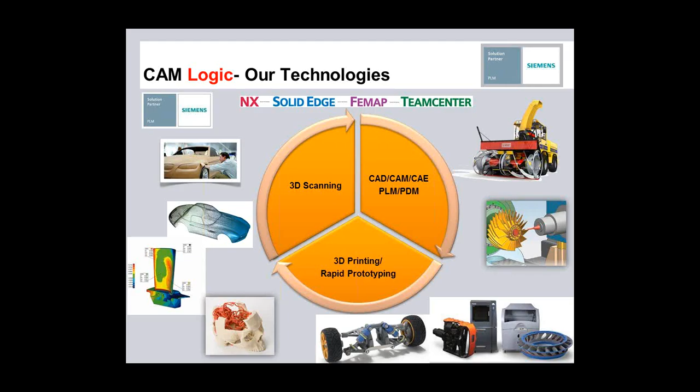If you are looking to learn more about Femap's powerful modeling functionality, this is the webinar for you. Today we'll take a look at some of Femap's powerful modeling functionality and see how it can be used to import a CAD model, fix problematic geometry, and prepare the model for subsequent modeling.

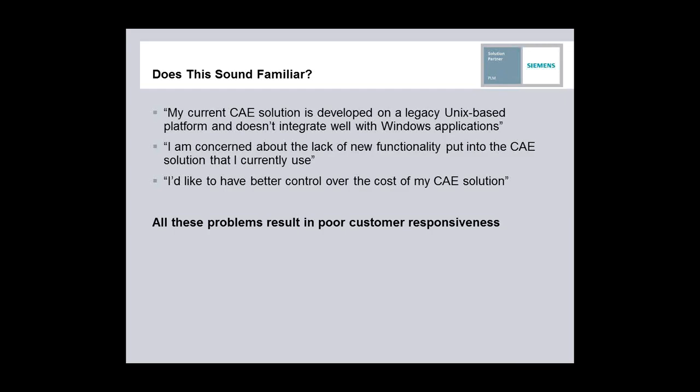Does this sound familiar? The most common problems aired by companies still tied to legacy Unix-based CAE pre- and post-processors sound something like this: there's a lack of Windows integration in both look and feel. These older platforms are aging in appearance and don't work with Windows very well, which in turn affects productivity. In some cases, development of these products has been sidelined by the developing company and is noticeably falling behind through lack of new functionality and working methods. Even though development of these products may have slowed, lack of investment in the product from the developers has not brought any cost reductions to the end users. All of these problems result in poor customer responsiveness.

How can you ensure your CAE solution is keeping up with the latest simulation technology? By introducing a modern simulation solution into the design cycle, you can design to more complex customer requirements through more advanced modeling and analysis functionality. With an up-to-date CAE solution, you can employ the latest simulation technology to more accurately represent not only the design itself, but also the operating environment in which it has to function.

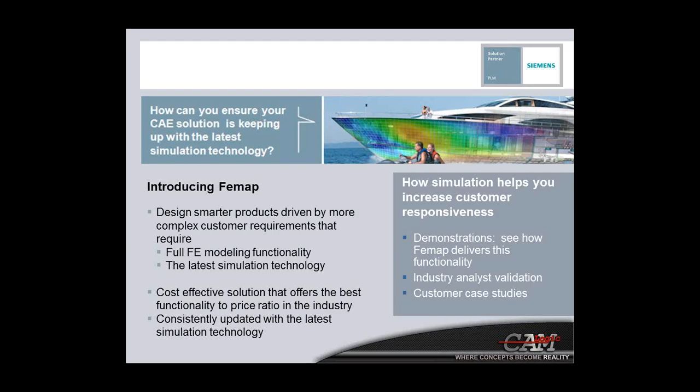In this presentation, we'll see how Femap can deliver these capabilities and see the benefits with industry analyst validation and customer case studies as backup. Femap packages powerful modeling functionality within efficient workflows and a modern Windows-native UI for maximum productivity. Additionally, Femap can help you prepare more advanced and complex designs for simulation. Let's examine how.

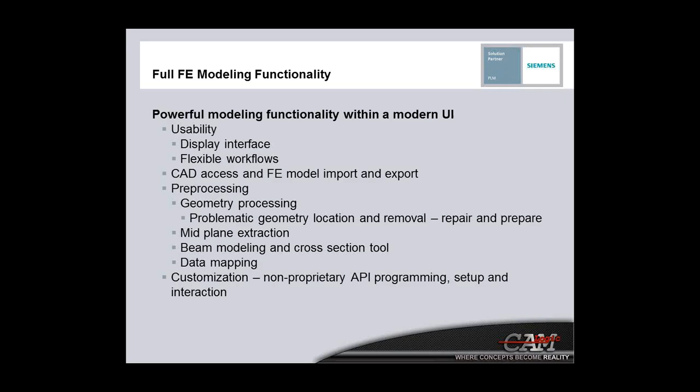Increasing design complexity puts greater demands on simulation and exacerbates the typical problems, such as accessing CAD data or dealing with overly complex or poorly defined CAD geometry that impede early implementation of simulation in the design cycle. Also important is the ability to accurately and efficiently represent the physical behavior of the actual design through FE modeling representations, which depart from slavish use of the solid model, requiring more creative modeling techniques. Using these techniques with representative models of complex designs requires proficient display controls to maintain productivity and ease of use. Customization is also important to allow interaction with other programs and to automate repetitive processes.

Femap is a high-performance, finite element analysis modeling tool with Windows-native ease of use. Femap originated as a program used in the demanding aerospace industry with CAE professionals, but with its familiar Windows look and feel, it is easy enough for any CAE experienced user to run. Femap is CAD independent, allowing you to import CAD geometry from a wide variety of sources. Femap is also solver independent, but has a high level of Nastran integration and can be purchased bundled with NX Nastran. When engineers need to get real results accurately and competently, they use Femap.

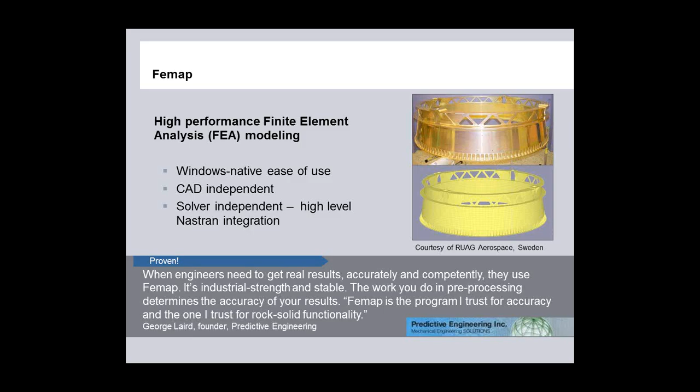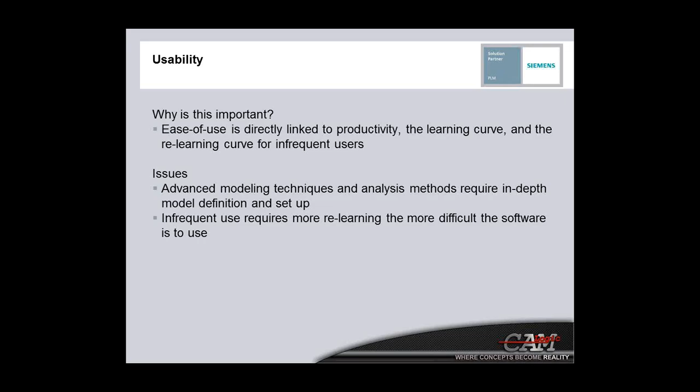The usability of a product is directly linked to the productivity of its users, including how quickly they can learn it and the relearning needed for infrequent users. Usability also impacts training cost: the more difficult a product is to use, the higher the training overhead. Advanced modeling techniques and analysis methods require in-depth model definition and setup, so positioning advanced features in an easy-to-use interface is a challenge.

Femap has been designed specifically as a Windows-native application, offering a user interface in the familiar Windows style that promotes usability and efficiency. As well as being easy to use, learning to use Femap is also easy, and a reduced learning curve means reduced training overhead, making the product easy to pick up for infrequent or intermittent usage.

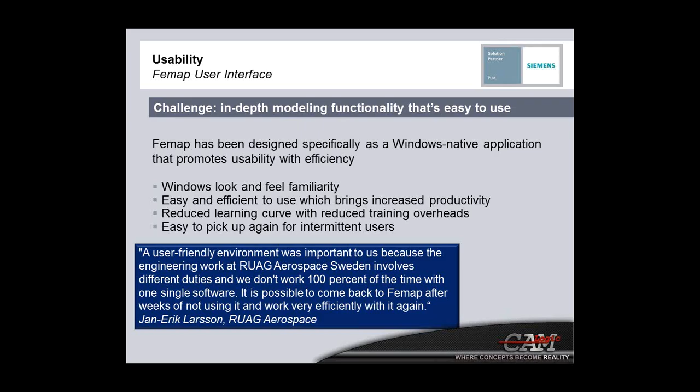One of the key features of Femap is ease of use, important both for productivity and for learning the product. Key to the usability of Femap is the user interface: Windows native, and designed to intuitively and efficiently display the detailed functionality necessary in a product capable of solving complex engineering problems. The user interface has recently evolved to include new features like the model info tree view and data table that effectively remove many layers and allow easy, direct access to the modeling data.

As Femap evolves, some of these features have increased in importance too. For example, the model info tree is now a main vehicle that allows access to new functionality as it is coded into Femap. It also offers a powerful way of uncovering functionality in an intuitive manner, allowing users access to the underlying modeling data.

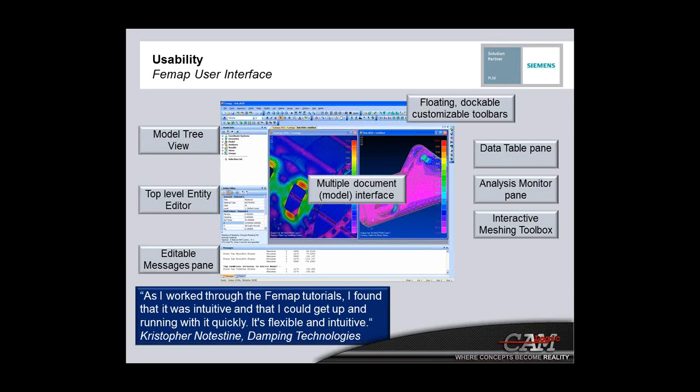These additions to the Femap user interface add variety to methods of working, or workflows, without ever taking anything away. So all of the original menus remain in place as new methods of interacting with Femap and accessing the underlying data appear, such as new panes in the user interface and new icon bars.

New icons have been added to various dialog boxes that allow workflow branching. This means that not everything has to be created sequentially and in a strict order. If a point is reached where other data is required before proceeding, these icons allow the work process to branch sideways, create the required definitions, and then continue without having to backtrack.

So Femap packs powerful functionality into a user interface that is intuitive and easy to use and learn. This makes its users as productive as possible.

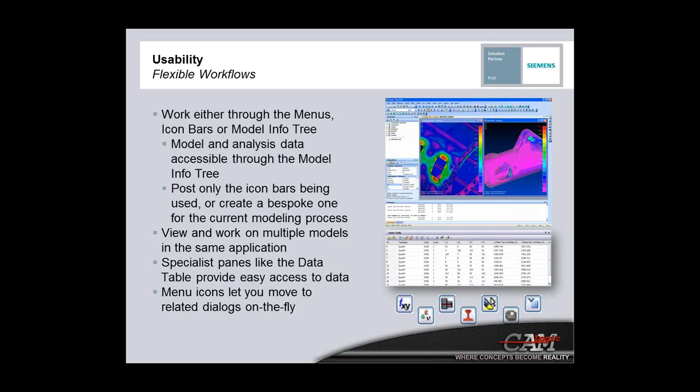Now let's take a look at CAD access and see why this is important, and review some of the main issues. The transfer of CAD data is desirable because it allows the CAD model to be reused for analysis purposes. However, the translation of the CAD model to the analysis environment is often fraught with problems. These can include a lack of support for a particular CAD data type or CAD system, or support not extending to the latest version of that system. There may also be limitations with geometry type support—for example, surfaces might be read in, but solids might not.

To overcome problems that obstruct data transfer, you often have to seek an alternative method to translate the model if possible, or resort to manually rebuilding the model in the analysis system. This, of course, can be very time-consuming and can end up delaying the whole design process.

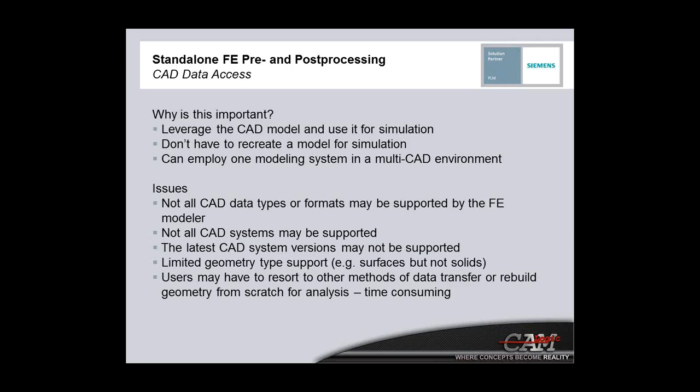Flexibility of data flow is key to a standalone, independent program like Femap. Femap can leverage the modeling data that already exists in your current CAD system, whichever it is, and use it as a starting point to create the simulation model. Femap is CAD neutral and can access CAD data from just about any source, supporting all major commercial CAD programs and formats, and is kept up to date with the latest CAD product versions.

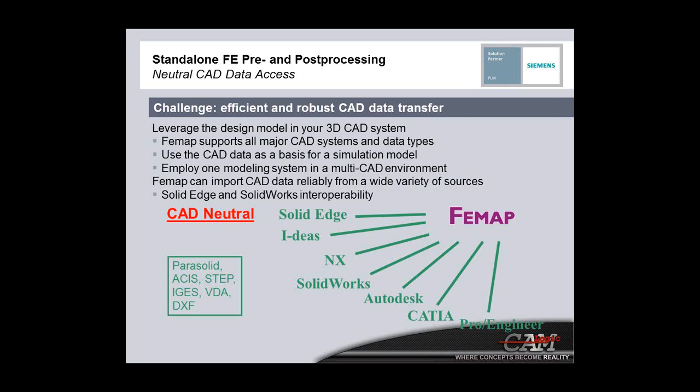The Femap modeling engine is based upon the Parasolid modeling kernel, the same one used by SolidWorks and Solid Edge. Femap and Solid Edge are fully associative via the PLM XML pipeline, which allows direct transfer of parts and assemblies. As Vincent Adinkrah's quote notes, using Femap and Solid Edge has reduced design errors and rework, helping SAFT Power Systems speed up their time to market.

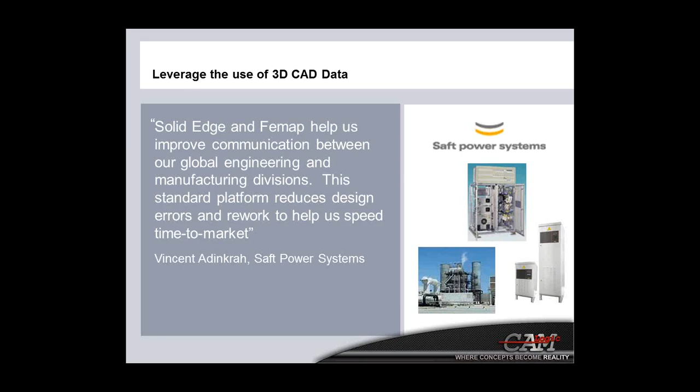One of the biggest impediments to the creation of a finite element model from a CAD model is bad geometry, whether it is inherent from the CAD model or introduced during import. From the CAD modeling perspective, the appearance of the model is often the only consideration. So it doesn't matter if it contains thin sliver surfaces or very short curves.

But from the FE perspective, however, these small features or discontinuities can disrupt subsequent meshing operations and make it very difficult to create a good finite element model. Some FE modelers may lose small model features completely during import, and there may be no indication that some detail has been missed. This makes it very difficult for you to ensure that the model integrity has not been compromised.

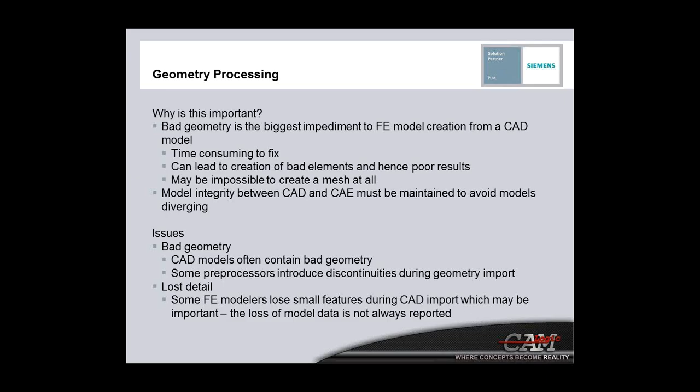Troublesome geometry, slivers, gaps, short edges, is one of the main obstacles that has to be overcome in the creation of a finite element model. Sliver surfaces, for example, lead to badly shaped elements being created at the time of meshing. Even finding where these problematic entities reside can be a major task.

This is where Femap's locator on the meshing toolbox comes into play. It is a dialog that you can use to control the search parameters and locate all of the troublesome curves and surfaces quickly and easily. Having located the problematic geometry entities, there are a number of tools available in Femap to make corrections and allow an accurate, well-shaped mesh to be created.

Two of these tools available in the meshing toolbox are combined composite curves that will join up separate curves together, and combined boundary surfaces, which similarly can be used to merge adjoining surfaces. Using these tools, it's easy to overcome or eradicate small curves and surfaces by merging them to adjoining entities and produce a smoother, more regular geometry model that is ready for meshing.

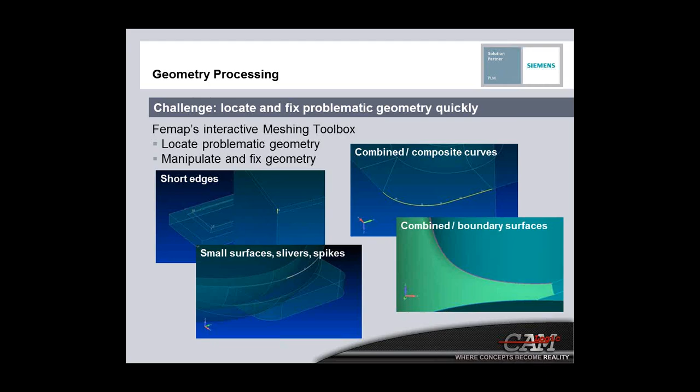Other aspects of geometry handling include the ability to remove unnecessary features like small holes, fillets, and chamfers from the geometry model, again to help create a better mesh. Using Femap's meshing toolbox, these unnecessary features can be suppressed manually, giving you the ability to select those features that you wish to remove, or automatically to suppress all features smaller than a specified tolerance.

Other tools available in Femap to help modify geometry prior to mesh creation include geometry splitters, which can be used to split large surfaces into smaller ones to help align the geometry and create surfaces that can be map meshed, which is a means by which regular quadrilateral surface elements are created. There's offset curves, which can create map meshable regions around complex geometry that comprises multiple curves.

There's washer, which uses offset curves to create map meshable regions around holes, which are typical stress raisers and where you would usually want a very good regular mesh for accuracy. And finally, pad, which creates the surface geometry surrounding a hole into 4 map meshable regions.

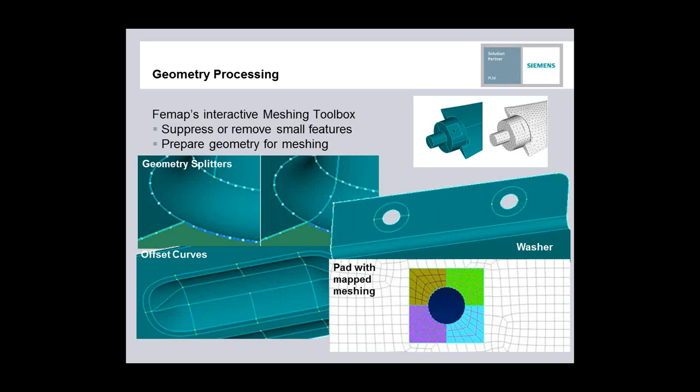Let's now look at the importance of modeling tools and see why some of the more simplistic approaches to FE modeling are not always appropriate. Accurate representation of real-world structures requires efficient finite element modeling techniques that stretch beyond the application of simplistic static analysis of solid parts. Finite element analysis most often comes down to a simple balance of accuracy versus model size. Yet there are many modeling techniques that can be employed to reduce the size of the finite element model without compromising accuracy.

With the advent of fast solid model meshers, it has become very easy to fill up a solid geometry model with tetrahedral elements. This leads to the creation of very large and unwieldy finite element models that require huge computer resources to run. Examples of geometry that is really unsuited for solid modeling are thin-walled type structures, for example, an airplane or ship-type structure, or frame structures such as a crane.

Also, while static analysis requires certain computer resources, if it is desired to take the same FE model and perform a more advanced type of analysis, such as dynamic response, then the computer resources required increase dramatically. Another issue that arises through the adoption of some finite element modeling approaches is visualization, particularly for plate and beam type models. You are able to view the model with plates and beams appearing fully represented, and model setup and verification become easier to complete.

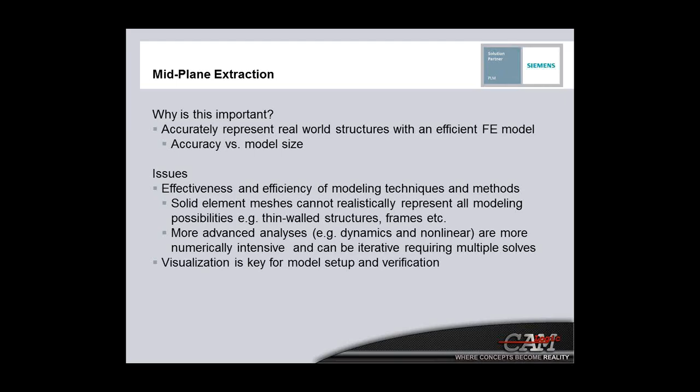NX Nastran offers a couple of solvers, sparse and iterative, which can be used depending on the type of FE model created. The Iterative Solver is very efficient at running large solid models for static analysis and is much faster than the sparse solver for this type of model and analysis. The sparse solver can be used to solve more general FE models that contain element types other than solids.

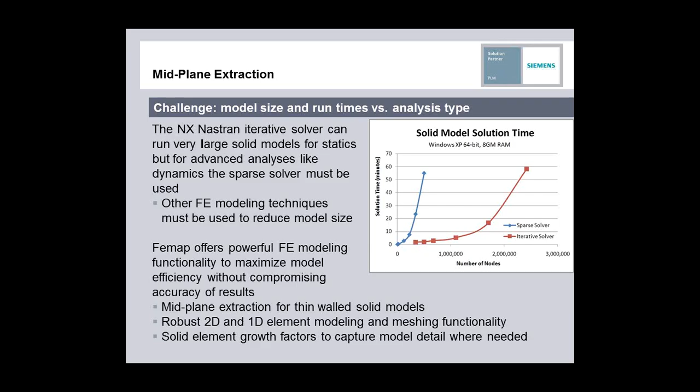However, if you're eventually looking to perform more advanced types of analysis, then it's important to bear in mind that the sparse solver will have to be used, and the FE model will have to be sized accordingly. Femap offers various modeling approaches that can be used to reduce model size without compromising accuracy. It is possible to extract the midplanes of thin-walled solids, which allow you to turn a solid model into a plate model. And Femap also contains some robust beam modeling, if a one-dimensional element topology is more appropriate.

Midplane extraction is a powerful tool designed to deal with thin-walled solid models. Such geometries are difficult to model accurately with solid elements without creating huge, unmanageable simulation models, and really lend themselves to being modeled using shell elements. Midplane extraction does just that. The midplanes of the solid walls are extracted and meshed using shell elements, thereby creating a smaller yet more accurate model of the structure.

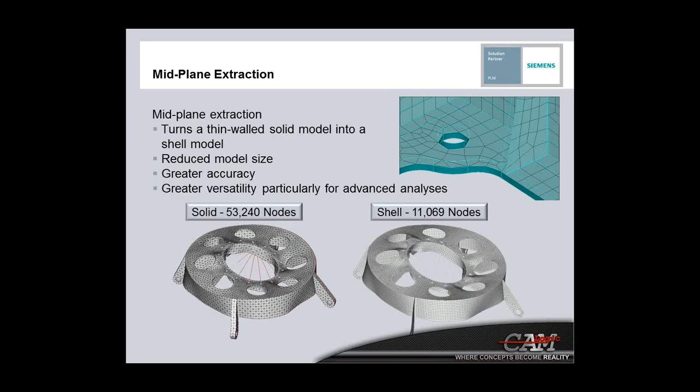Another important modeling capability in Femap is beam modeling. Femap offers a method of automatically determining the physical properties of a cross-section that you define, as well as offering a library of commonly used cross-section shapes. Also, as mentioned before, full beam visualization is available, which lets you view the beam elements as if they were solids.

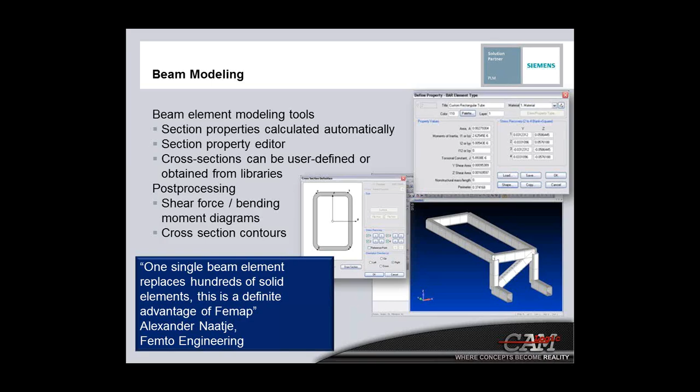Post-analysis, it's also possible to view beam shear force and moment diagrams. The ability to define spatially distributed loading allows more sophisticated and advanced loading specifications to be created that more accurately represent real-world operating environments. Also, it's possible to pick up the results of one type of analysis and apply it to a subsequent one for multi-physics problem solving.

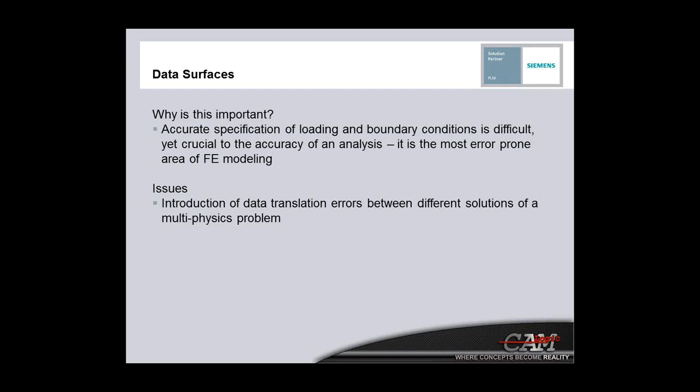Advanced tools like this are important, particularly for load and boundary condition definition, as accurate real-world loading definitions are difficult to create and prone to error. A recent addition to Femap's pre-processing functionality are the data surfaces, useful to define more complex loading conditions. Data surfaces come in various topologies, from 1 to 3-dimensional, as well as some special cases.

A typical use of data surfaces, shown on the slide, is to take the pressure results from a flow analysis in a pipe system and apply them as input loading on a structural model of the pipes to determine the structural response due to the fluid flowing in the pipes.

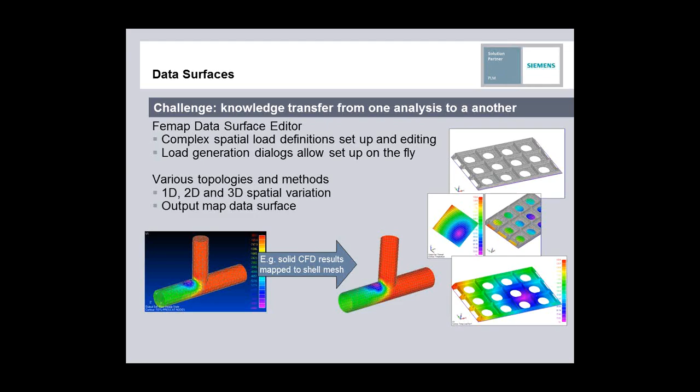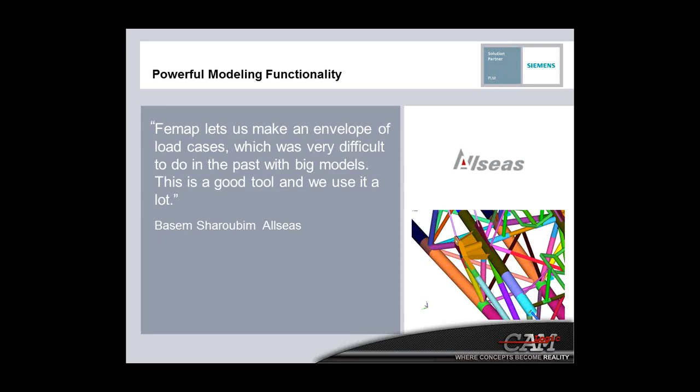The more advanced and involved types of solutions invariably demand the ability to modify or enhance the simulation approach. In the process of setting up a model for analysis, there are often repetitive steps of commands that would be laborious to complete without a method of automation. Also important is the need to integrate with third-party software products like Word and Excel. Some competing products offer customization methods which use a proprietary language. A customization capability that uses standard programming languages removes the need for special training and programming abilities.

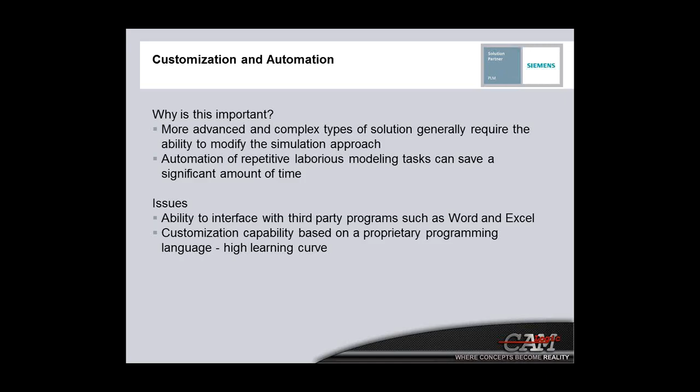A key feature is the customization functionality, which is seeing increased use within the user community. Femap offers a full application programming interface, or API, with its own non-proprietary programming environment, right inside the user interface. The OLE/COM-compliant object-oriented API is a full-featured BASIC development environment that provides direct access to all Femap objects and functionality. Using the API, Femap can be made to interface with any other OLE/COM-compliant program, such as Word or Excel.

And you can create custom programs that automate repetitive tasks, search model or results data, or transfer model information to Word or Excel to create a customized report. In addition, many useful programs are delivered with Femap in an ever-expanding library that can be found in the Custom Tools toolbar. As well as the API, Femap also offers a macro capability that allows a series of commands to be recorded, edited and debugged, and played back.

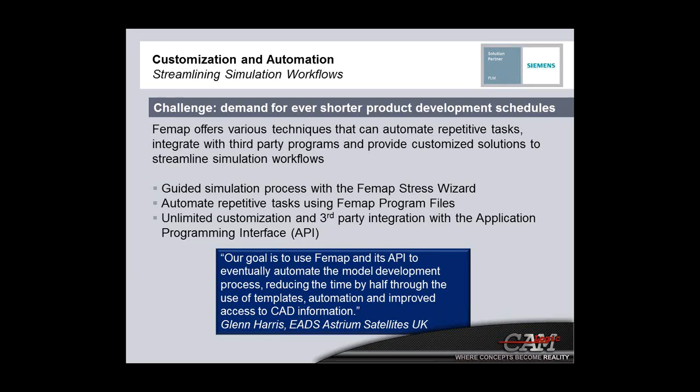One of the simpler forms of knowledge capture in Femap is the Femap Stress Wizard. This is a step-by-step guide through the analysis process, which helps users to set up all of the model attributes in a straightforward manner. With the model set up, the wizard guides the user to solve the analysis using NX Nastran and subsequently review the results. The Stress Wizard can easily be picked up by non-specialists or infrequent Femap users.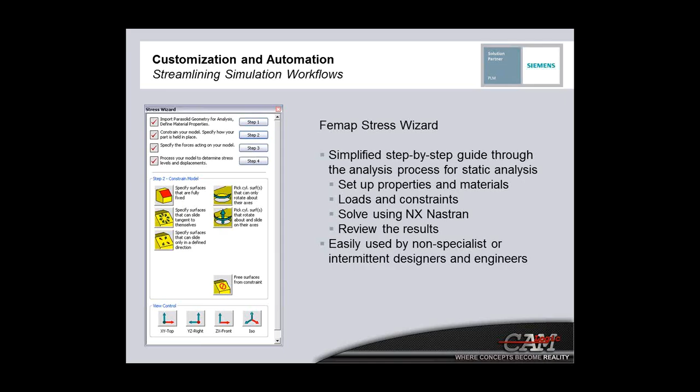A simple method of automating work process in Femap is the Femap program file capability. This facility can record sets of commands which can be edited and played back to automate repetitive command sequences. Program files can also be modified to accept user input and executed from API scripts.

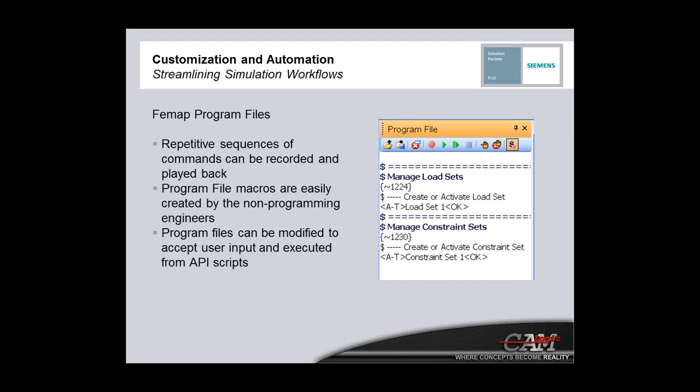Femap also has an Application Programming Interface, or API, which can be used to extend Femap functionality and automate work processes. The API is object-oriented and allows direct access to all Femap objects and functionality. It is also OLE/COM compliant and can interface with other compliant programs, again, such as Word and Excel.

Femap offers a fully featured BASIC programming environment inside the UI with IntelliSense function descriptor auto-completion and a means of stepping through the program for interactive program debugging. There are a number of pre-written API programs delivered with each release that are accessible through the UI.

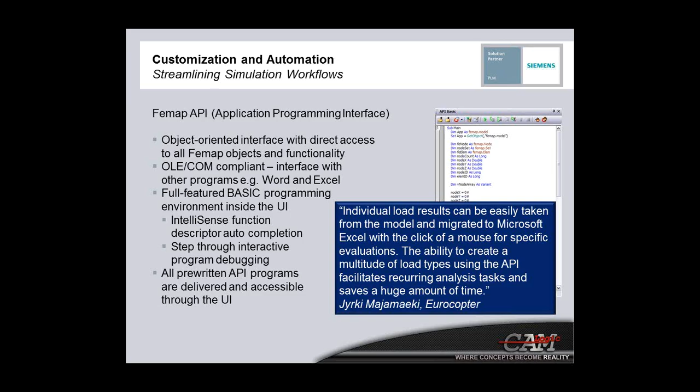Now let's take a few minutes to look at a quick demonstration which shows midplane extraction of the solid bracket model and subsequent geometry modification in preparation for meshing.

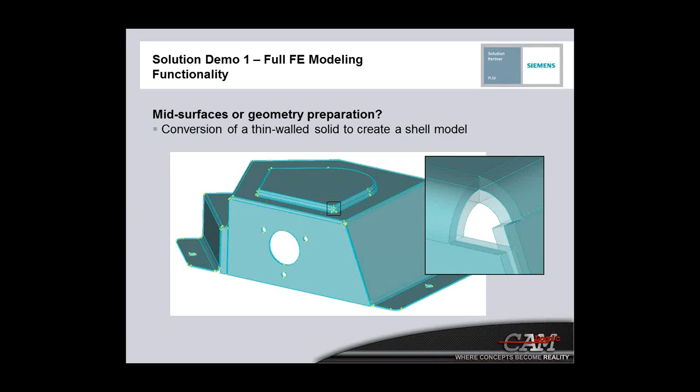Yvonne? Yes? I've got a technical glitch on this side here. I can't do the demos. All right, not a problem. Let me go back to the... Sorry about that. I'll get back to you. Not a problem. Let's go back to the presentation. I just need the screen back.

Thank you. In the simulation-driven design white paper, the Aberdeen Group state that customers must develop more products that are more complex for their customers, and they must get them to market on time. The paradox, however, is that more time must be taken in the design process to perform simulation so that time and money savings can be seen in testing. However, best-in-class manufacturers all use simulation in the design process, which yields fewer prototypes and allows manufacturers to get their products to market earlier and for lower development costs.

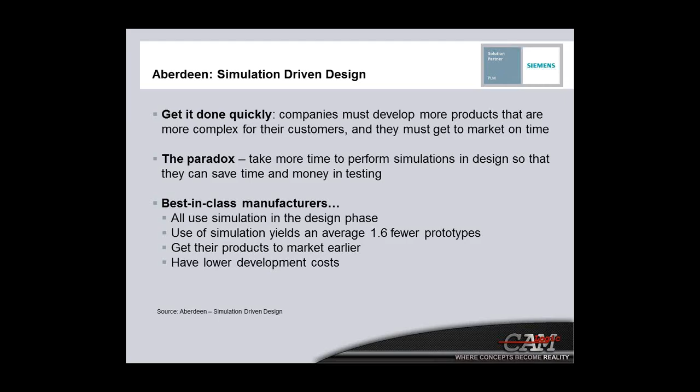This is an overview of the Key Knife case study. The challenge that Key Knife faced was to quickly turn innovations into products and diversify their expertise and create new markets. Key Knife adopted Femap with NX Nastran that allowed extensive control over the analysis, leading to replacement of most physical prototypes with virtual prototypes. This resulted in significant savings and reduction in prototype development time for each new product developed, and led to a better ability to compete both in the core business and with diversification into new markets.

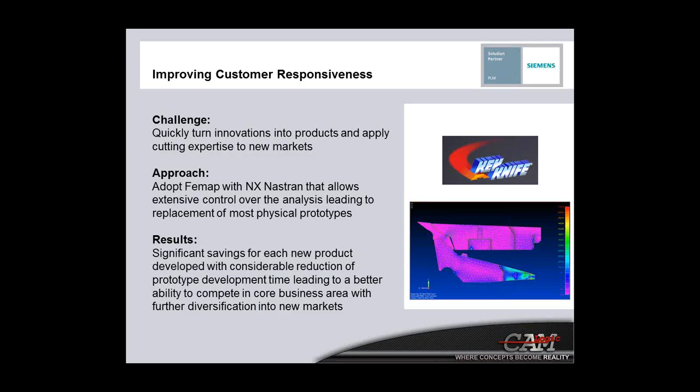John Greiner of Key Knife notes that Femap speeds time to market by guiding them with new applications and allowing better control of their mesh, which allows the ability to apply more loads and restraints in ways that make sense.

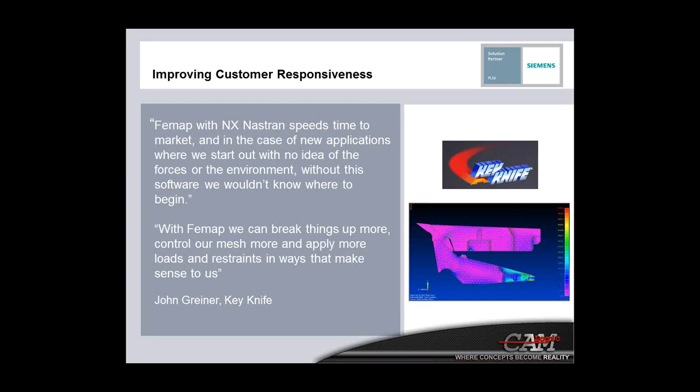Now let's take a look at how successful Femap is on a global basis. Whether you are a manufacturing company or a job shop, your products or services follow a similar product life cycle. Siemens PLM software helps improve customer responsiveness through accelerated launch, reduced build times, increased profitable growth, extended lifecycle returns, and best practice reuse.

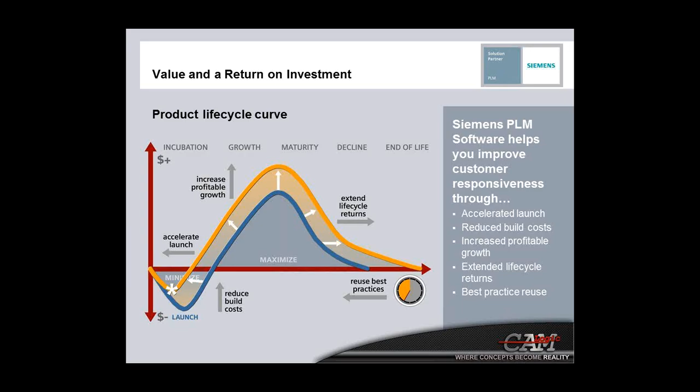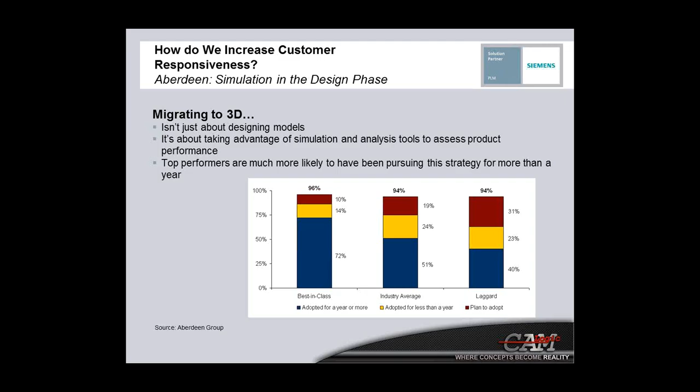According to the Aberdeen Group, migrating to a 3D design solution is not just about designing models. It's also about taking advantage of simulation and analysis tools to assess and validate product performance. Top performers are much more likely to have been pursuing this strategy for more than a year.

The Aberdeen Group also related how prototype time and build costs vary across product complexity. This chart here indicates 4 levels of product complexity defined in terms of number of parts and length of development. Products that are virtually tested have a higher chance of passing physical prototype testing the first time. The point here being, get it right the first time.

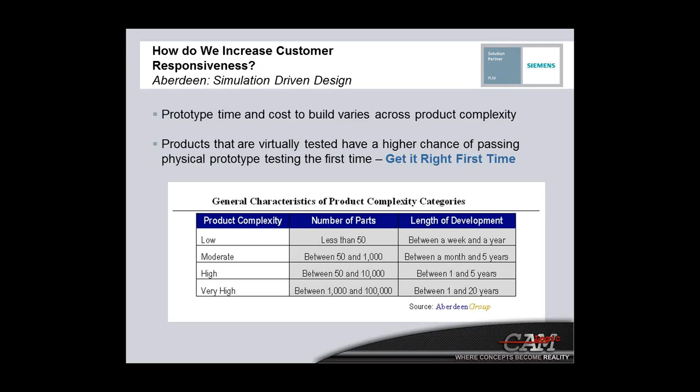In yet another Aberdeen Group study, through the use of simulation, the best-in-class manufacturers can get highly complex products to market 158 days earlier with $1.9 million in lower product development costs. The simpler products are to market 21 days earlier with $12,000 lower product costs. The benefits of using simulation in manufacturing of products are amazing.

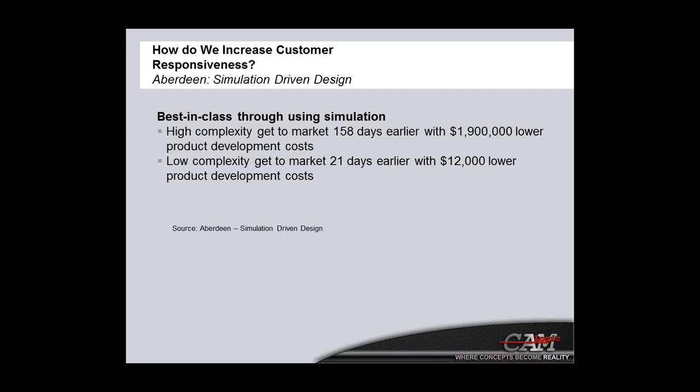So how do we increase customer responsiveness? Through the use of simulation, we can reduce physical prototyping and hence time to market, lower the cost of design, and get a faster return on investment. We can significantly reduce material usage and hence cost, and improve product performance, which reduces product failure in the field and costly recalls. Simulation also feeds innovation by allowing design flexibility and the ability to evaluate different designs digitally.

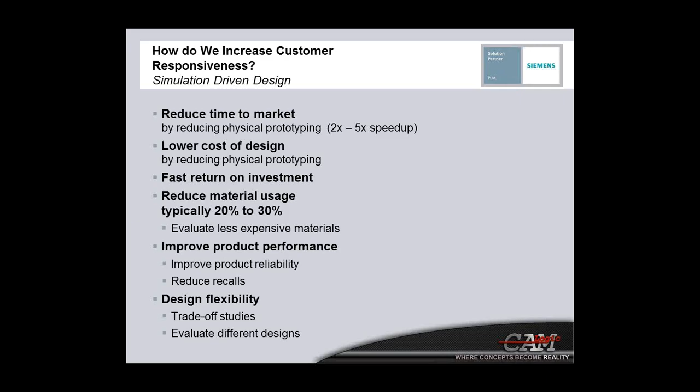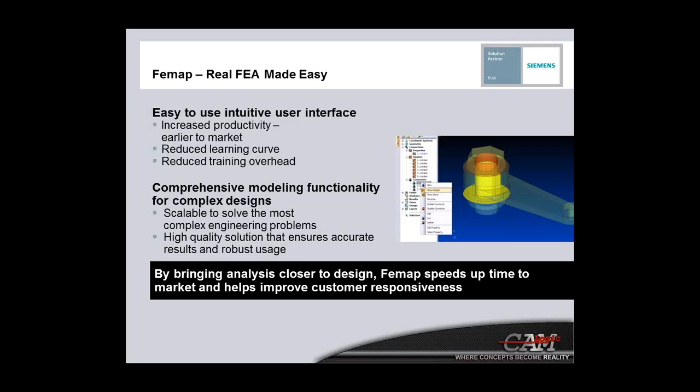So in summary, Femap is real FEA made easy. Femap has an easy-to-use and intuitive user interface that increases productivity of the engineers that use it. Being easy to use means it's also easy to learn, which brings about a reduced training overhead. Femap incorporates comprehensive modeling functionality that can simulate complex designs, and simulation functionality that is scalable to solve complex engineering problems with a high-quality solution that ensures accurate results.

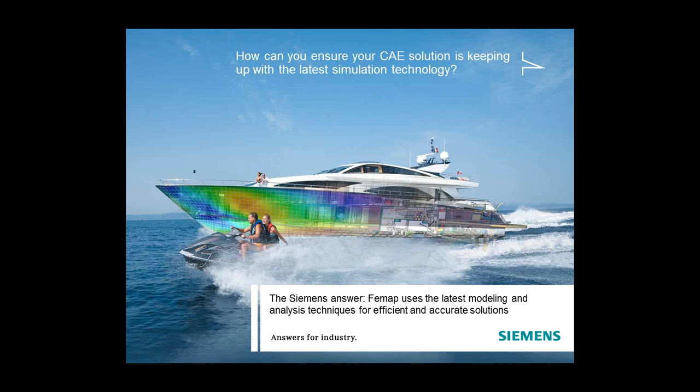In response to today's question posed at the beginning of this webinar, the Siemens answer is, Femap uses the latest modeling and analysis techniques for efficient and accurate solutions. Improve your customer response by handling more complex customer requirements through the use of simulation, by reducing time to market and meeting their deadlines with reduced physical testing, and by minimizing product costs with more efficient designs through the use of simulation.